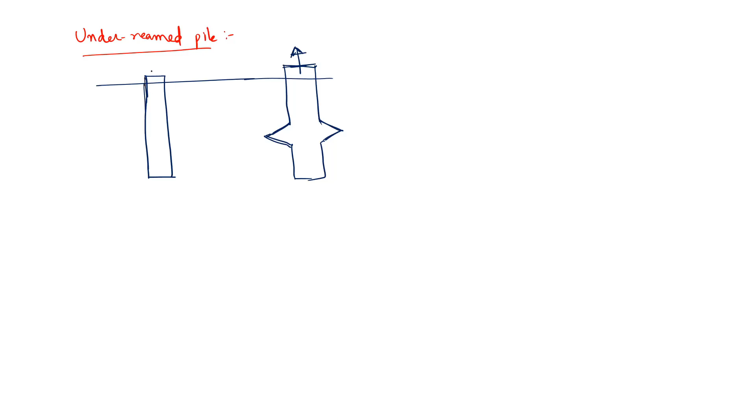normal pile, when you apply compression load, there can be resistance from the surface as well as from the bottom. So when you are applying compression load, a normal pile will give the resistance at two places. One is around the surface, one is at the bottom. Suppose the same pile is subjected to uplift load, then the resistance will come only due to the skin friction.

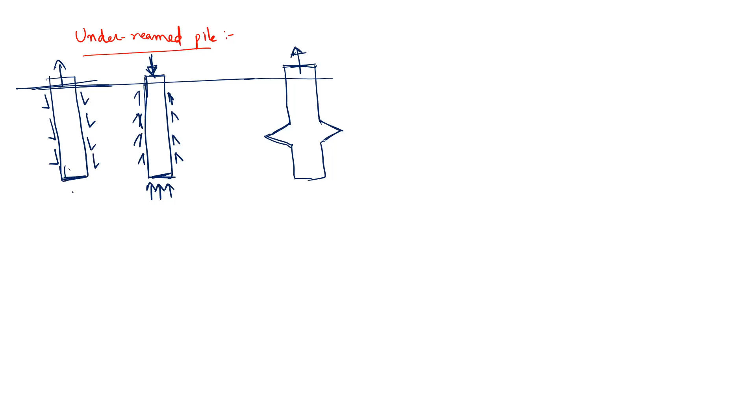There will not be any contact when you are applying uplift load. Because of that, you cannot get any bearing capacity. Bearing capacity cannot be in tension, right? The two different materials are getting detached, so there will not be any capacity. So that's how the capacity will be reduced in case of uplift in normal piles.

Whereas to increase that uplift capacity, there will be a small bulb provided. Maybe the diameter is 2 times the diameter of the shaft. If this is the shaft, this will be the bulb. The diameter of the bulb can be twice that of the shaft. So now when you are applying, the skin friction capacity will come because it is uplift load, whereas the resistance will be in the downward direction.

Okay. So now, when you are pulling this, there will be bearing capacity on this bulb. Due to this bulb, there will be bearing capacity throughout this, right? It is giving downward force when you're trying to pull this up. So that's where these under-reamed piles are useful. Okay.

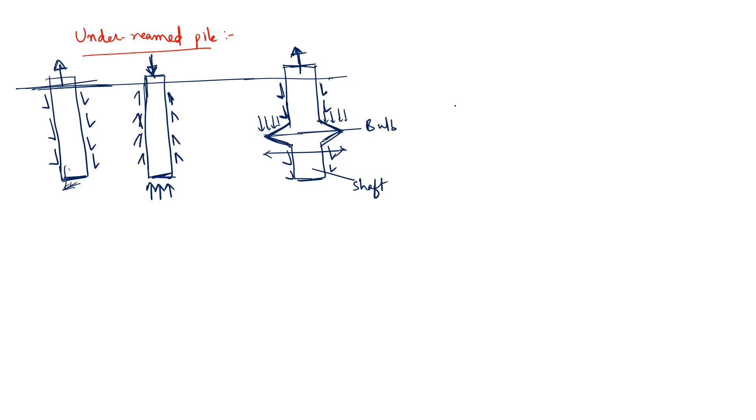Now, to go for the capacity calculations, first you can have end bearing capacity plus skin friction resistance. So total capacity will come from end bearing capacity, this one, and skin friction resistance, this one. Okay. In normal piles, suppose this is compression. So in the uplift, what will happen?

You will not have end bearing capacity. You will have only shaft capacity, that is due to skin friction. Skin friction shaft capacity plus, see, when you are pulling up, the weight of this pile is always acting downward due to gravity, so that will also resist this uplift load. So you can add the weight of the pile in case of uplift capacity.

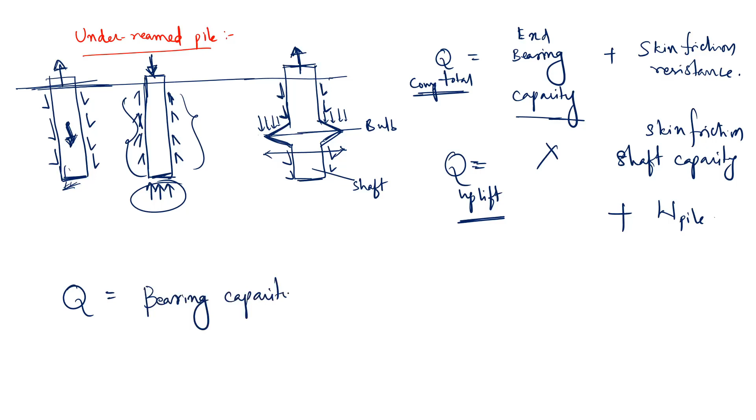So let us derive the equation to calculate the uplift capacity of the under-reamed pile. See, the bearing capacity at bulb plus skin friction resistance along the shaft plus weight of the pile gives Q uplift for under-ream.

Okay, so bearing capacity at bulb, see this, at bulb, downward bearing capacity, right? And skin friction resistance along the shaft plus weight of the pile, W pile, which will act downward. So to get the equation, first let us go for bearing capacity. If you know the shallow foundation capacity, you can write c Nc plus q Nq plus half gamma B N gamma.

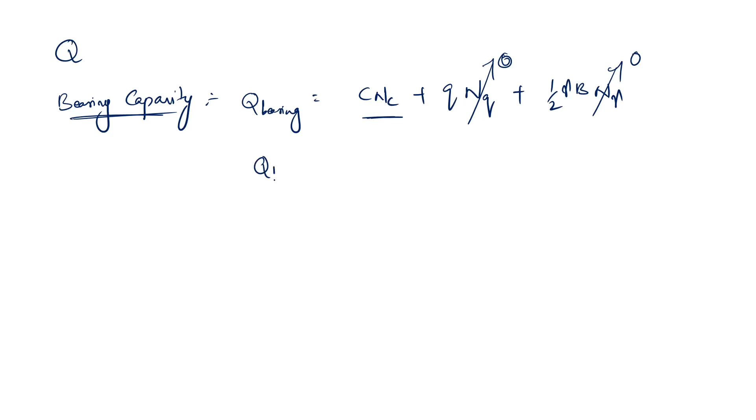See here, as it is clay, this will become 0. As it is net capacity, this will become 0. So you will be left with only this. Okay, Q bearing will be, so small q, I'll refer with small q because it is in terms of pressure, bearing capacity in terms of kPa. So that is c Nc, bearing capacity. Skin friction

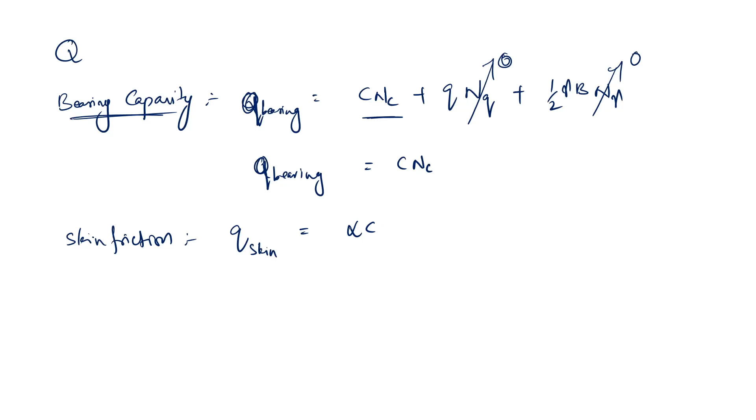resistance, you can calculate skin friction as alpha times cohesion or alpha times shear strength value. Okay, so alpha times cohesion. Now, if you take the frictional resistance between the clay soil particles only, that is C, cohesion. But here it is between two different materials. This is clay, whereas this is pile, concrete. Because of that, this will be reduced by some adhesion factor, that is alpha. So this is how you will take it.

So as the skin friction is along the length, what you have to do is take the average cohesion value along the pile.

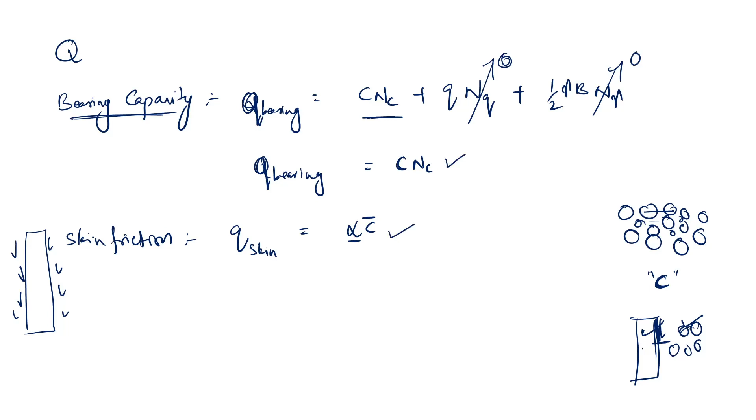So you know this now. This C is not the average value, it is C at the bulb, because you are calculating the bearing pressure at the bulb. That's why C should be at the bulb. Nc value should also be taken at the bulb. Here alpha is constant, whereas C is the average over the depth. Suppose the C value is varying linearly, you have to take half of it; if it is 0 and 10, you take 5, which is the average. That's how.

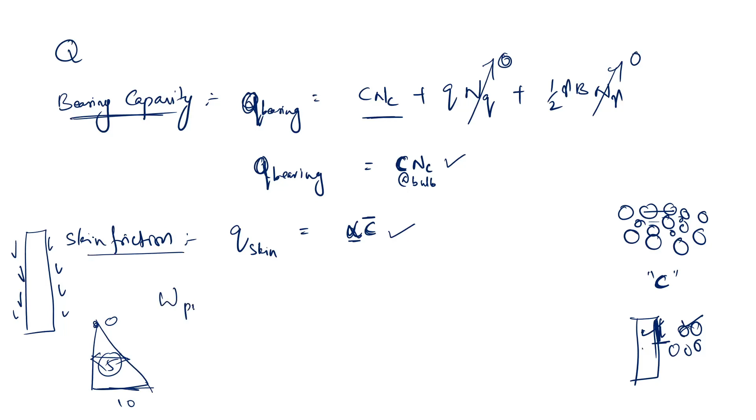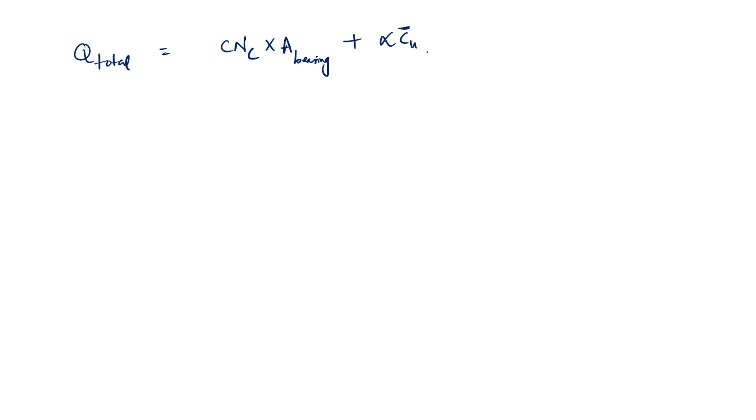And another one is the weight of the pile. What is the weight of the pile? 20 kilonewton. If you add these three, you will get the capacity. Q total is C Nc in kPa multiplied by the bearing area, plus alpha C average times the side surface area, so that you get kilonewton, then plus 20 kilonewton, that is the weight.

Now, what is C? C is 50 kPa given and Nc is given 9. A bearing we will find out now. Then alpha is given 0.3, and Cu is uniform in the question, so the average also becomes 50 kPa. Then A surface we will calculate. Weight of the pile is given 20. So C is 50, alpha is 0.3, Nc is 9.

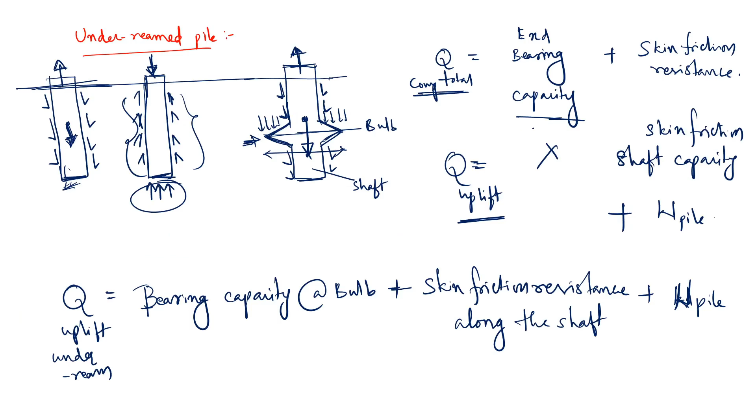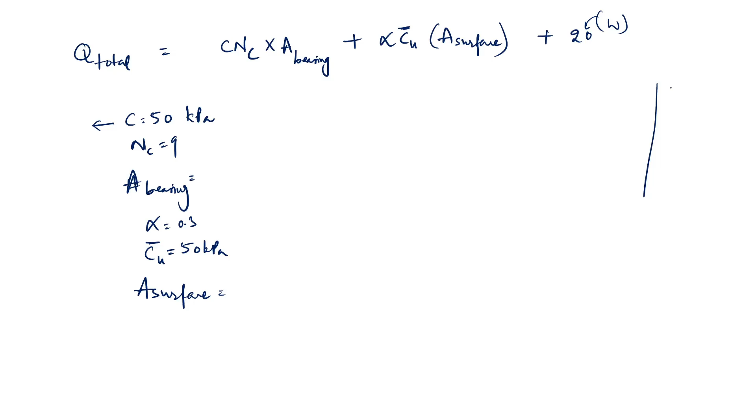Here I'll just draw. This is the diameter of the bulb, denoted dB, and this is just D. Total length is L, and length of the bulb is LB. Total length is 8 meter and length of the bulb is 400 mm, meaning 0.4 meter.

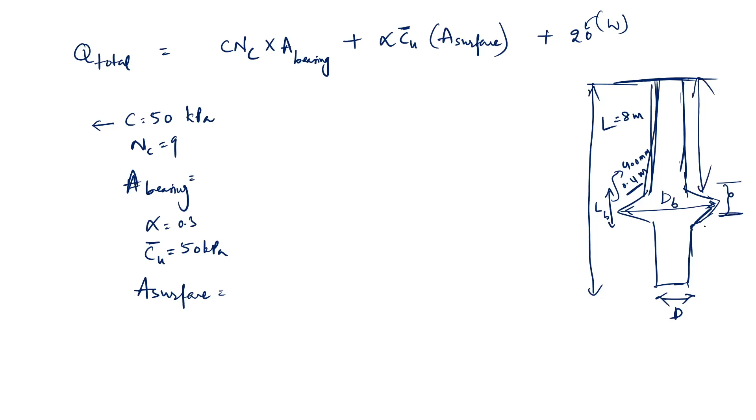So skin friction cannot come from this place; over this height you cannot get skin friction, only for this length. Also, why is it mentioned in the question, neglecting the suction? Suction means whenever you are pulling up, suction is created here, giving reverse end bearing. So reverse end bearing is neglected.

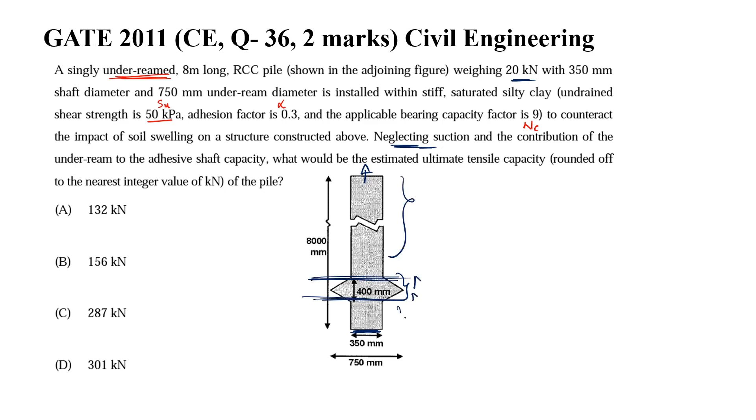Also, the contribution of the under ream to the adhesive shaft capacity, which means skin friction, is neglected for this portion. You take only this area for skin friction, and the bearing area is only this area. You cannot take this as bearing area, because you are neglecting the suction.

Now coming to the area of bearing. This portion is the area of bearing. How to get that area? Total area is pi by 4 dB squared. Take the big circle cross-sectional area minus pi by 4 D squared, and you get the remaining annular area on which the bearing pressure acts.

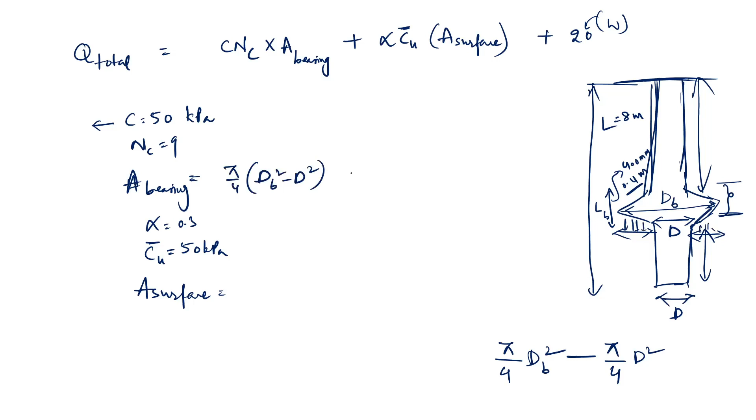So this is pi by 4 times dB squared minus D squared, with dB 0.75 and D 0.35: 0.75 squared minus 0.35 squared. I calculate it is 0.34557.

Then A surface. You take only this portion, not this one. The pile is nothing but a cylinder, so surface area is pi times the diameter of the pile times the length. Length is total length minus bulb length, so you deduct this height from the total length. That's how you get the surface area.

You take only D. So pi D L: L is 8, LB is 0.4, D is 0.35. This equals 8.356636 meter square.

Let's substitute all the values in this equation. Q total equals 50 into 9 into A bearing 0.34557, plus 0.3 into 50 into A surface 8.356636, plus 20.

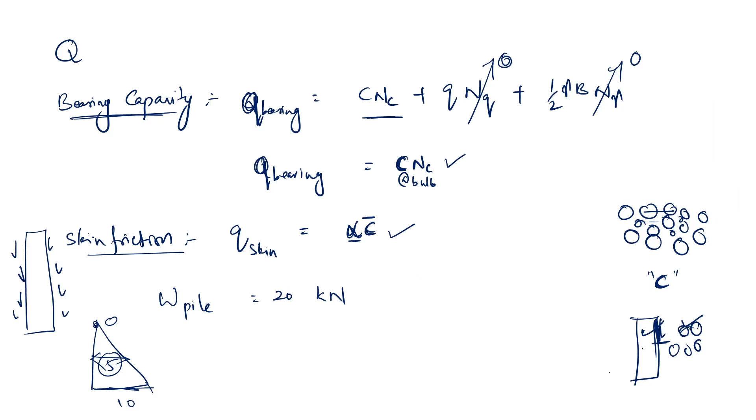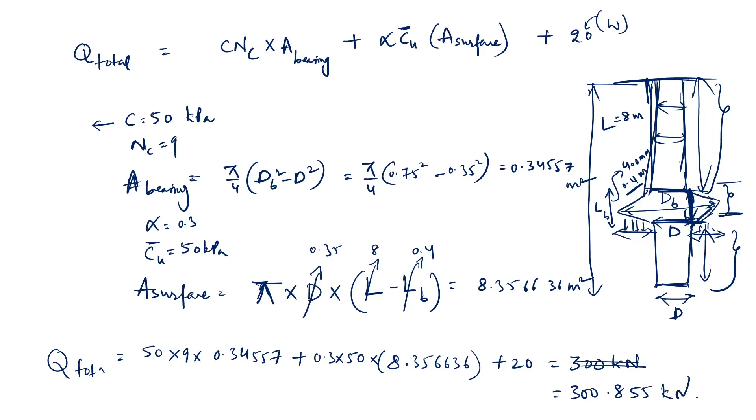Calculating: 50 into 9 into 0.34557 plus 0.3 into 50 into 8.356636 plus 20. Total is about 300 kilonewton. I have got 300.855, so the nearest integer will be 301. So the answer is D for this question. Thank you.